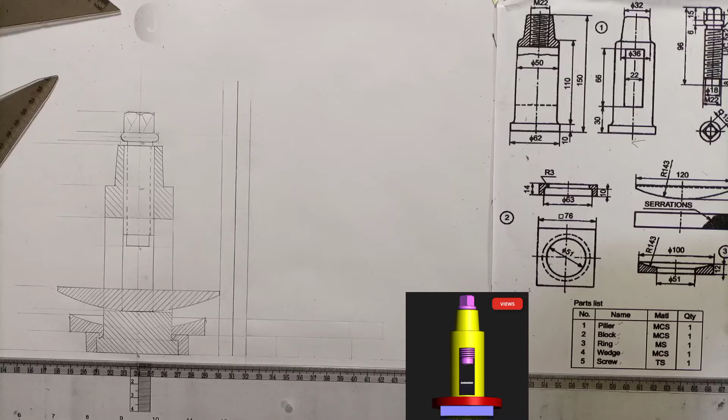Today we'll be drawing the end view or end elevation of an assembled single tool post. From our arranged diagram, we'll project these lines to our right, project our lines to our right, and project the other lines to our right.

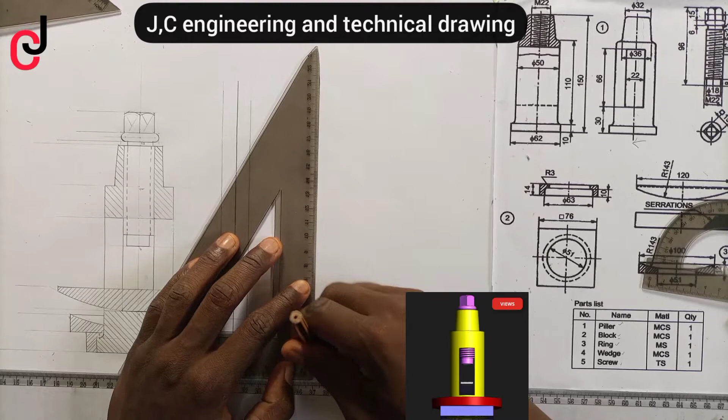Now we'll look at our image, the one with the longest distance, which is this square having 100 millimeters. So we'll measure 100 millimeters, indicate it with a point, and at the point of 50 we'll also indicate the point to serve as our center line. So we'll indicate at point 50 to be our center line, which we've done—50 to my left, 50 to my right.

Now I'll project from here, measuring 50 to my right. I'll project it with an outline touching the two horizontal lines, and then indicate it with an outline to hit the edge of my vertical line. I'll also outline this portion, which indicates that I'm done constructing my ring.

100 by 100 is a square, my ring, which has 12 millimeter height—from here is 12 millimeter. So the next thing, I'll move to my block, figure 2, the block having a distance of 76. I divide 76 by 2, giving 38 millimeter.

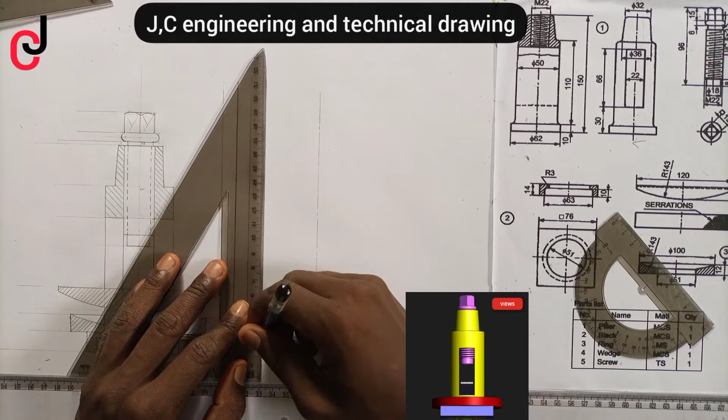I'll measure 38 millimeter to my left, indicate it with a point, then 38 millimeter to my right, indicate it with a point. Then I'll project those points upward to hit the upper horizontal line, then join the base with an outline. So I've succeeded in getting this path.

Now, knowing that from my wedge, I'll project the last point of my wedge to a straight construction line, and then I'll project the top of my wedge also. Now I'm done with that.

Now if you observe well, you find that from the diagram of my wedge we have 16 millimeter height, which is this, and then 18 millimeter wide. So divide 18 by 2, giving 9. So I'll measure 9 millimeter to my left, 9 millimeter to my right, 9 millimeter to my left, 9 millimeter to my right.

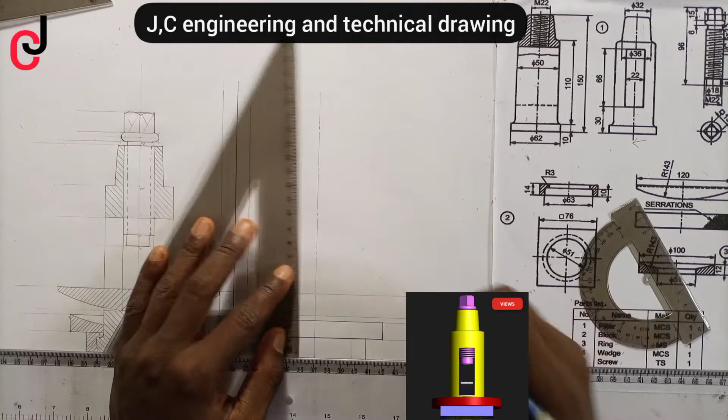Then I'll project using my set square to hit my upper horizontal line. Then I'll outline the base and the top of it, giving me this. Now the next thing I'll do is from my diagram, figure 1, the pillar—you find out that the diameter is 50.

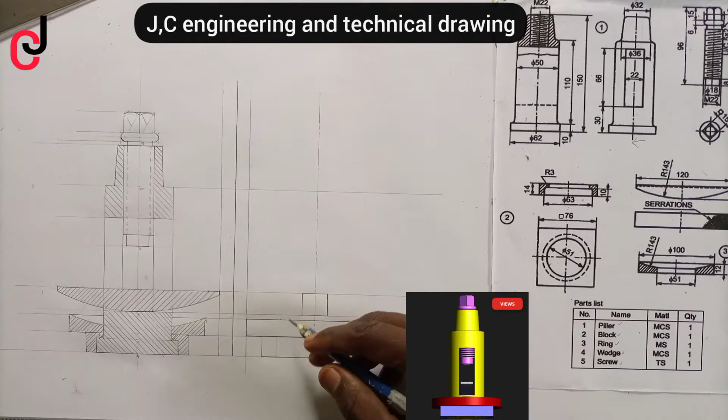So we'll take 25 millimeter to our left, 25 millimeter to our right, 25 to the left, 25 to the right. Then we'll project upward, move our set square first, then project our line up. At our points, we project 25 millimeter to my left, project it upwards and outline, also 25 millimeter to my right, the points with an outline.

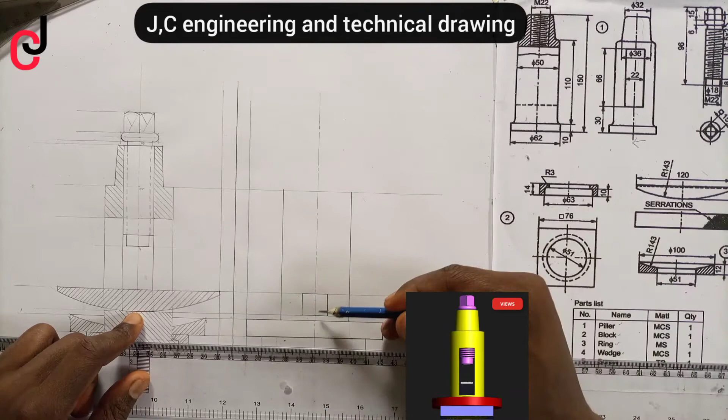Now we also project the distance of 66 millimeter from this end of our wedge upwards 66 millimeter, which is this line, already gotten from our diagram. So project that line to my right, and then you discover there's a distance of 22 millimeter.

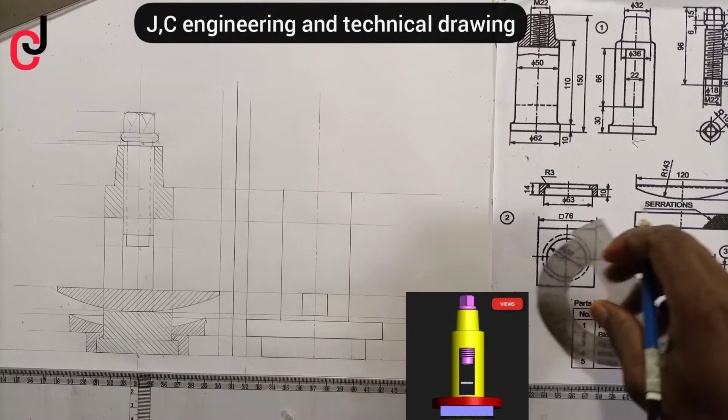So if you are drawing that at our end view, measure 22 millimeter, that is 11 millimeter to my left, 11 millimeter to my right, 11 millimeter to my left, 11 millimeter to my right. Then I'll project those points up to hit my horizontal line, project them up to hit my horizontal line.

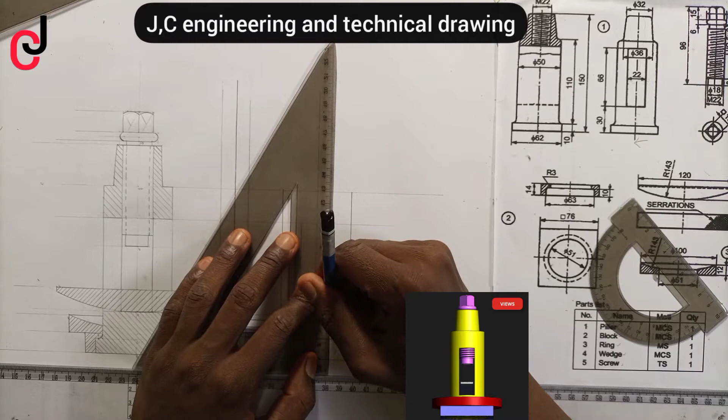Since it's reaching the bottom part of my wedge, I'll also make sure it hits the down part of my wedge this way. So I'll outline the base of it and then also the top of it.

Given that this distance is 36 millimeter, you divide 36 by 2, which gives you 18 millimeter. So measure 18 millimeter, indicate the point. Measure 18 millimeter to my right, also indicate the point.

Now having 2 points, also from the top of our pillar, find out that this is 32 millimeter, which is 16 millimeter to my left, 16 millimeter to my right. From the top, this is 16 millimeter to my left, 16 millimeter to my right.

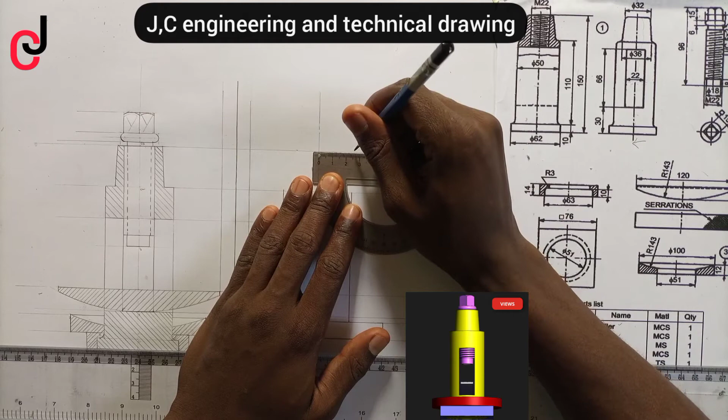Then we'll join those points together, can outline. Then we'll outline the top of my pillar.

Now using the same distance, this is distance 3 millimeter from our diagram. From our left, we project. This is distance of 6 millimeter, we also project.

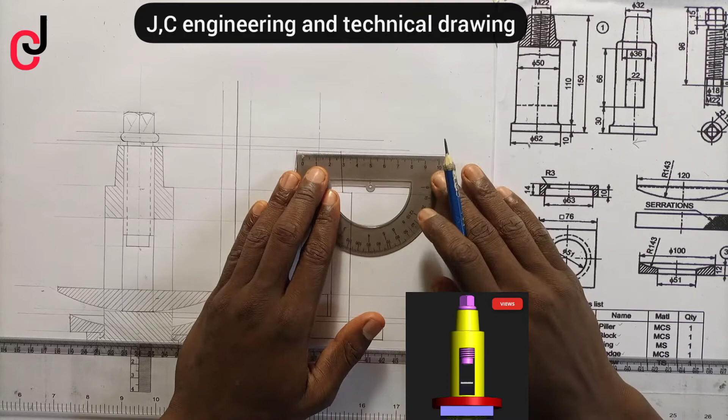Now the distance between this and this is 18 millimeter. So measure 9 millimeter to our left, 9 millimeter to our right. From here, 9 millimeter to my left, I indicate with the point. 9 millimeter to my right, also indicate with the point.

Then I'll project those points upward. Project the points upward. And then I'll make this portion an outline. That shows I've gotten this. The next is 6 millimeter upward.

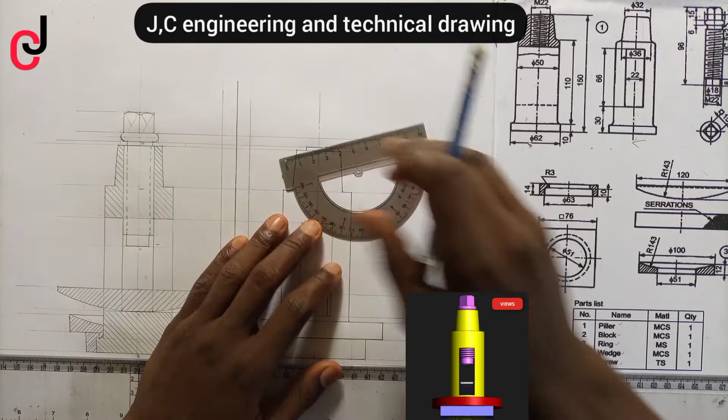Knowing that the length is 28 millimeter, so we measure 14 millimeter to my left, 14 millimeter to my right, 14 millimeter to my left, and then 14 millimeter to my right. Then I'll project with a construction line.

Knowing that this is 6 millimeter height, I'll take the midpoint from my left. I've indicated it, so I'll project that midpoint straight. Now using the radius of 3, I'll have my curve.

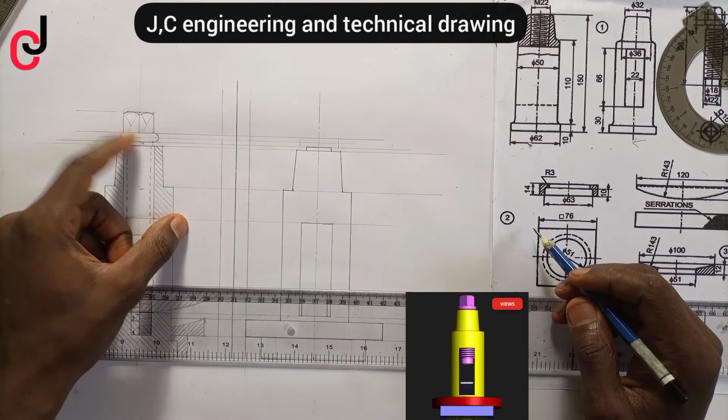Now using radius of 3 millimeter, you bring it to the edge, indicate the point. Using that point, you construct a semicircle. Be careful since your radius is small so you don't make mistake.

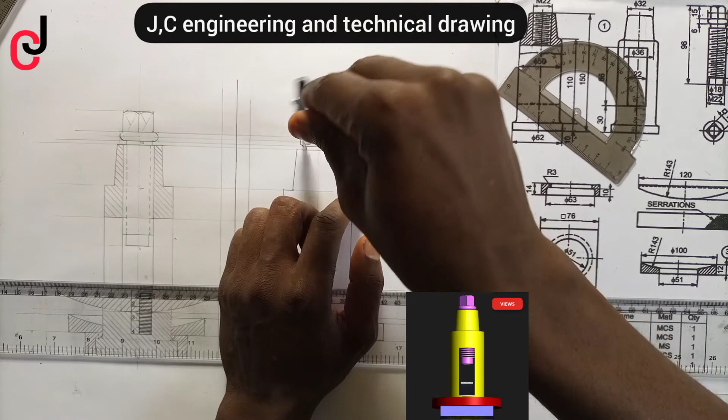So similarly here we'll do the same stuff. And then we join them together. Then we join the top also together. Now we project the top of our screw head.

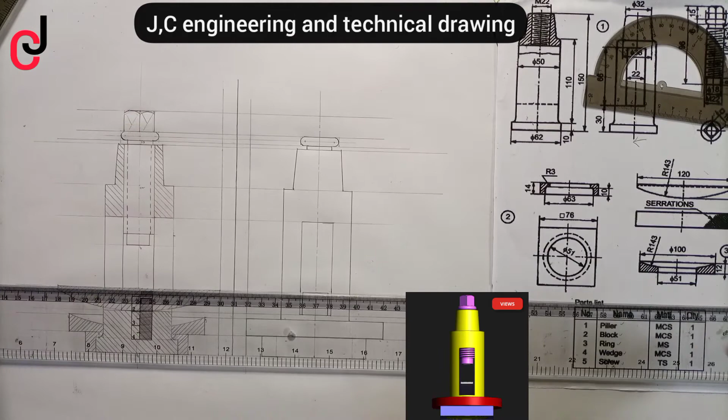Now knowing that we've already done the calculation of 15 multiplied by 1.4, knowing that our distance is 21 millimeter, so measure 10.5 millimeter to my left, 10.5 millimeter to my right.

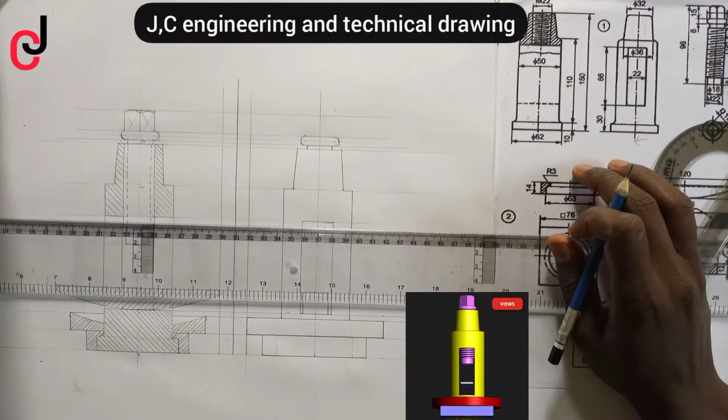So we'll project those points upward using a 60-degree set square.

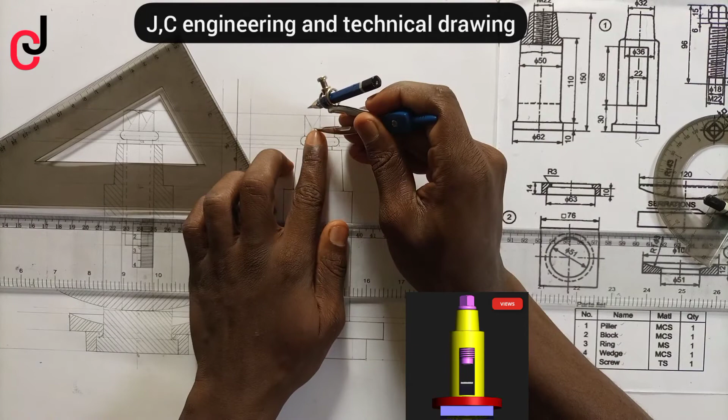Draw a line and then use same 60-degree set square, you bisect that point. Now open your compass at the point of their intersection, the point of meeting, to the top.

Then you draw an arc. Also you do similar stuff to the right part.

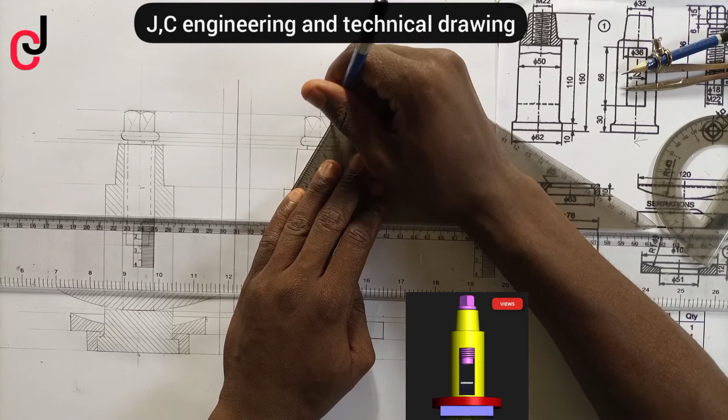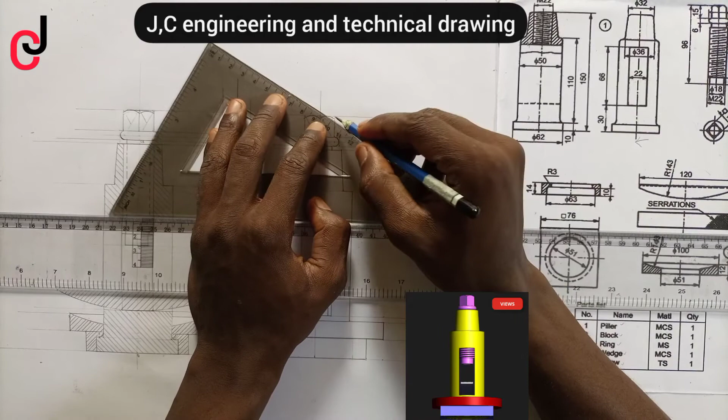Then the point of which they meet to the top of, then you join using 30-degree. You make sure you have a straight line to cut.

30-degree, you place it very well, you cut. Also you join.

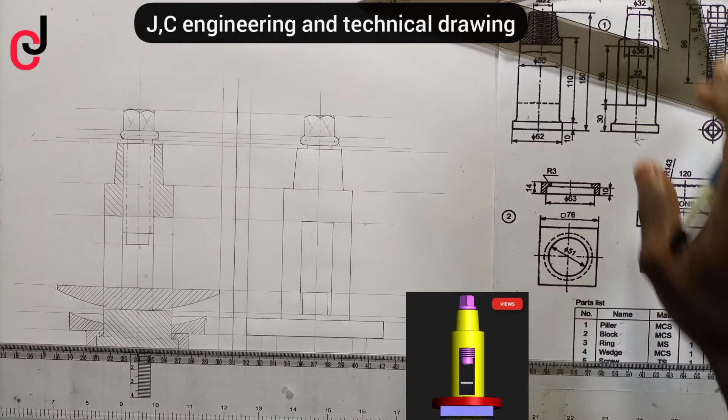So then from our image, from point B we project to our left, also project top of point B to the left. So we measure 18 millimeter. So we know that our top already is 18 millimeter.

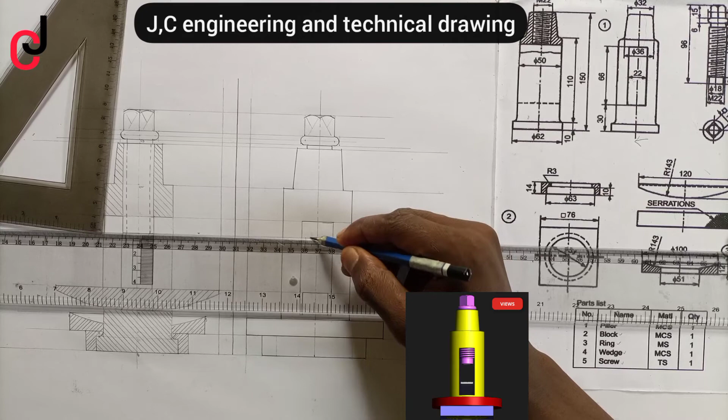So just project our top downward here to hit, to join our two horizontal lines together. Then we outline, and then we outline. We can also join these lines together since our screw here is 22 millimeter.

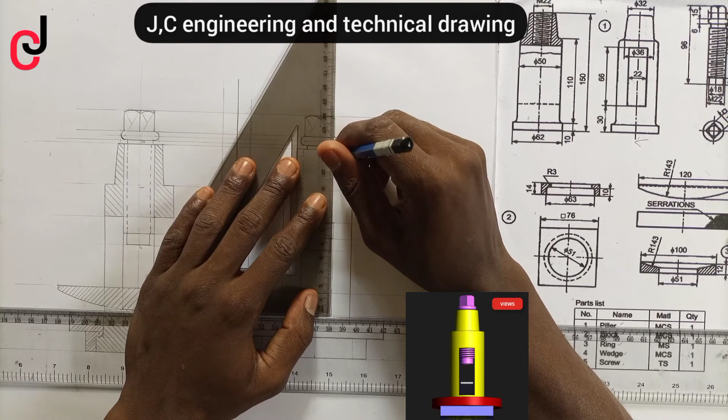Then we indicate this with a hidden line, small construction line, showing that there is an image passing through this at 22 millimeter distance. So our screw thread is 22 millimeter since that is 18.

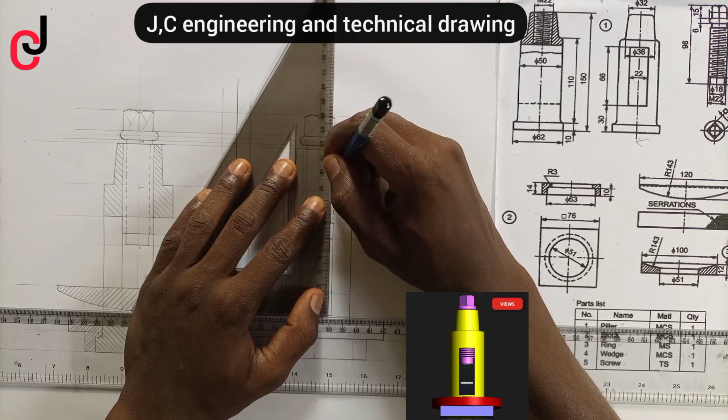So we indicate also, and then we'll indicate. So we're done. In doing that,

We're done with that. This is the end view of our assembled single tool post.